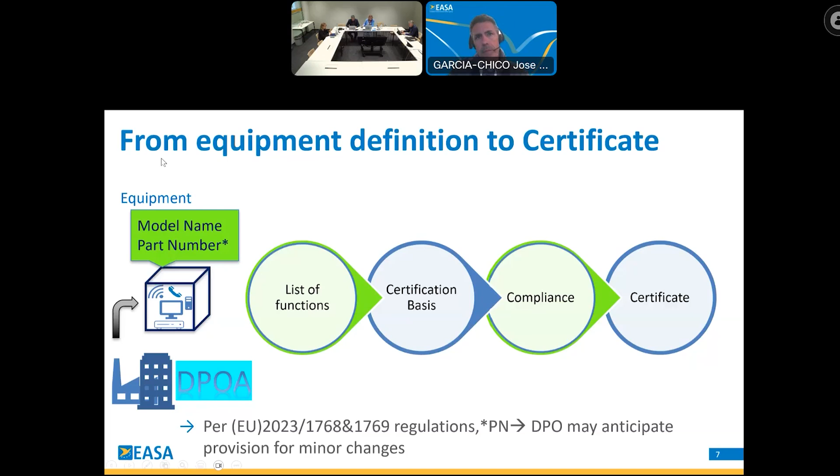So then if we transfer this in more generic terms, we were in the certification context. Now let's take the broad picture of the full conformity assessment attestation. Here in the conformity attestation, if we cover a certificate, but also declaration of design compliance and SOC per Article 4, 5, and 6 of the regulation, we have somehow the same concept. The difference is where do we have interaction with EASA.

So the applicant, in the case of DPO, in the case of Article 4 and 5, we will need a DPO approval, and it's a DPO that goes for declaration of design compliance, or goes for certification. But we start with a model name and a part number to describe the equipment.

The initiator of the attestation would list the functions that are embedded into the equipment. This list needs to be present in the attestation. Then with this list of functions, the attestation basis can be defined, meaning what are the applicable detailed specifications that apply to this equipment.

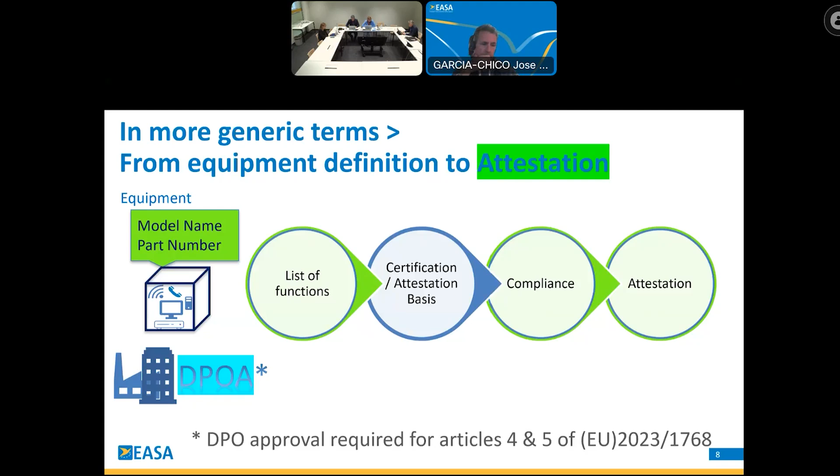Now let's look more deeply at the definition of the certification basis and the attestation basis. In the context of Article 4, we will speak of certification basis. Article 4 equipment of the 1768 regulation requires an EASA certificate.

As we just said, the equipment is described with a list of embedded functions. This list of embedded functions is typically described in a certification program. But the certification basis will already be defined at the time of the application. In defining the certification basis, it's actually all the detailed specification sections that are applicable to the listed functions, plus the applicable general section.

We need, in the definition of the certification basis, to reference the issue of the detailed specification that is applicable at time of application. Today, the detailed specification is at issue 1, so there is not much debate on what is applicable. But imagine in 10 years when we have, for instance, six issues of the DS - how does it work? It works at the time of application. The detailed spec that is applicable is the one issued at the time of application.

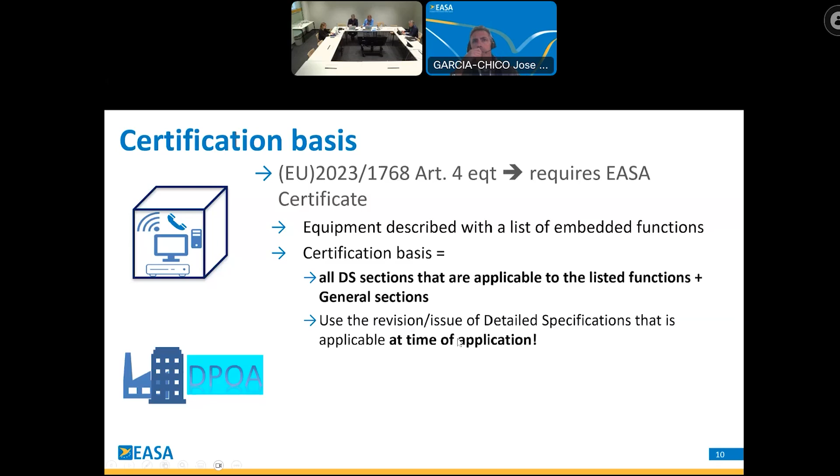Here's a small diagram to explain this over the long life. Imagine we have a detailed spec and the application occurred while we were at issue 1 of the detailed specification. If the certification project lasts more than, let's say, 2 years, then we would probably have issue 2 of the detailed spec already. The applicable detailed specification is still the one at time of application, so issue 1.

Nevertheless, it's always possible, on a voluntary basis, for the DPO holder to make a deliberate choice to elect to comply with a later issue of the detailed specification. The DPO could elect to comply and change the detailed spec issue to issue 2, for instance.

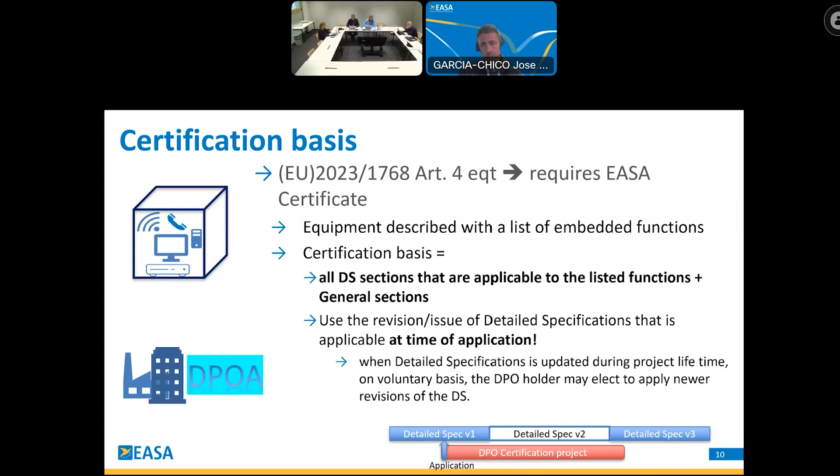Now let's come to an example on how to define the certification basis - for instance, a voice communication system. We go to the detailed spec. The detailed spec applicable for voice communication system is DSGE-DEC. In this document, you have a Part 1 that is general, applicable to all equipment in DEC, and a Part 2 that is for certification. Inside Part 2, we have Subpart B on air-ground com, and then Section 2, voice communication.

So the applicable certification basis would be Part 1, the generic section, plus the one referencing the voice communication system. So we go to Part 2, where there would be a generic applicable section, and then go to Section 2, where the voice communication function is depicted in requirements and AMCs. This is an example for a single function in the equipment - just the voice communication system function inside that equipment.

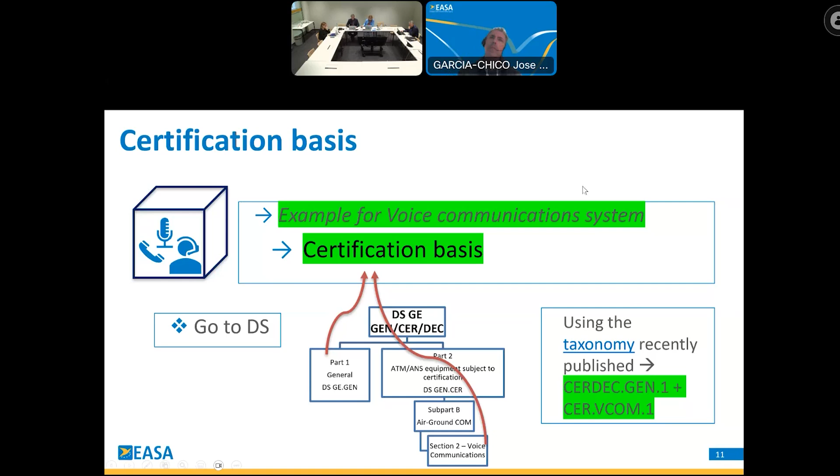In case of multiple functions, all the detailed spec sections that are applicable to the listed functions define the certification basis, associated with their general section. Here we've identified a case where a function goes under certification, Article 4, so there is an application to a certification project at EASA. But if this equipment also contains functions that are part of declaration, Article 5, or part of SOC functions in the detailed spec, then we need to identify them in the attestation basis in the equipment.

By this, we want the equipment functionalities to be well depicted in the certification project as part of a meaningful set of functions working together, and also to guarantee that there is no alternate function that could impair the certified function. That's the main logic behind this. We want the certification basis, then the attestation basis, to be complete and well defined in the certification program to cover all the embedded functions. They will also be part of the final declaration document, the DDC document.

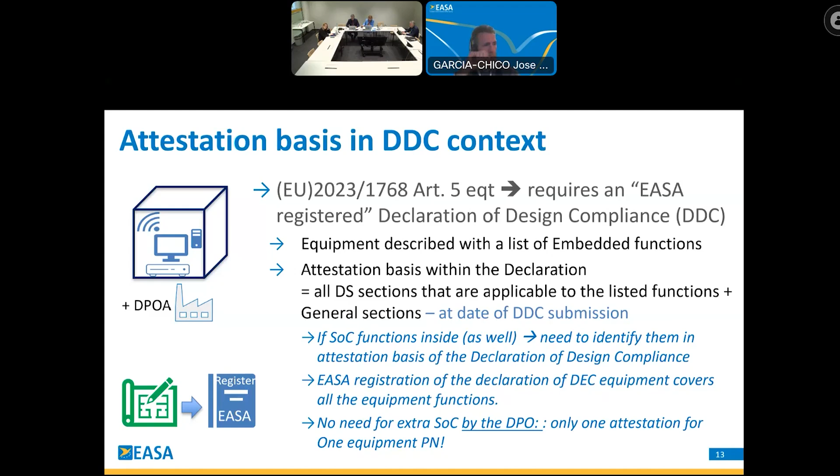Now let's go to the SOC context. In the SOC context, you see at the bottom, we don't identify DPO because the SOC is issued by ANSP, or it may be issued by the DPO in case the DPO has been delegated the task by the ANSP. So in the case of SOC context, it's only functions that require an SOC. They cannot be embedded certification or declaration functions within an SOC, otherwise it would be an Article 4 or an Article 5 equipment.

The attestation basis would be all the detail spec sections that are applicable to the listed functions. So here we look at DS SOC, and we apply the general section of DS SOC, and it will be the attestation basis that is applicable at the date of the SOC release.

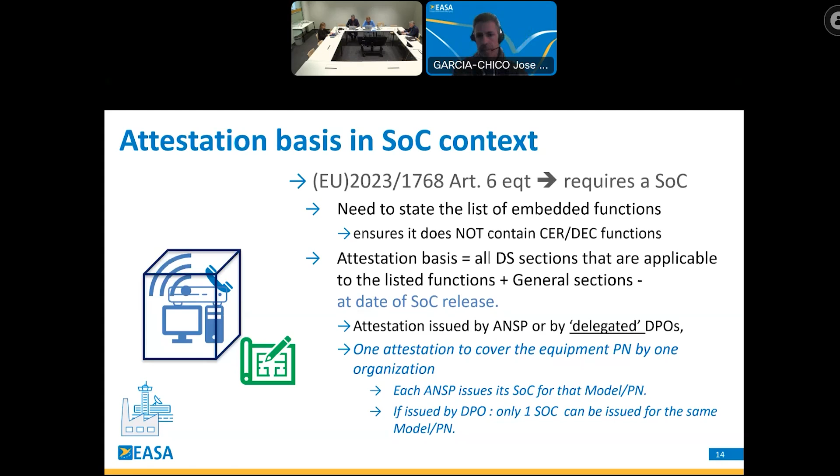The attestation is issued by the ANSP or by delegated DPO. In this case, there is one attestation to cover the equipment PN by one organization. Each ANSP issues its SOC for that model PN. So in that case, an ANSP would issue the SOC one single time for that model and part number. And in the case it's issued by DPO, it's only one SOC that can be issued by the DPO for the same model name part number.

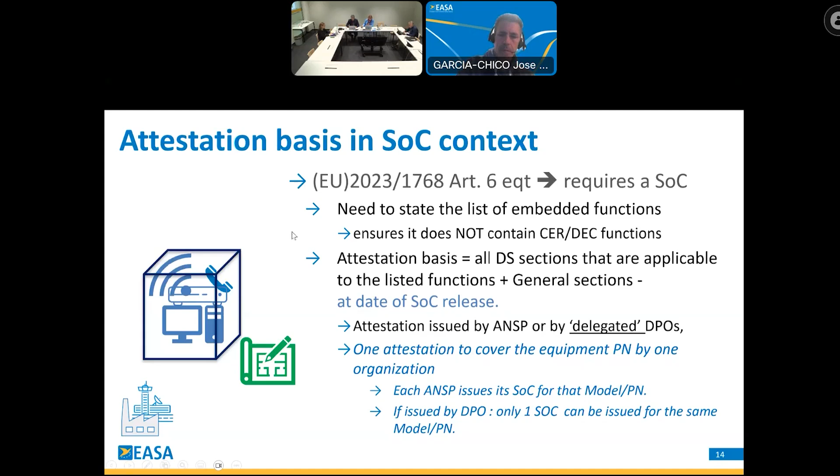Let's move now to the specific situation where a deviation has been requested. What happens to the certification basis? In the 1768, we have extracted here the article that speaks about the certification program, and that inside the initial certification basis, there is a possibility to propose deviation.

We will have some further slides about the generic process of the deviation, but we want to identify that the deviations will follow a certain process that will be subject to EASA approval. The deviations, when approved, to the applicable detail specification and their AMC, they are in a manner amending the applicable cert basis. So the cert basis will be the applicable detail specification together with the associated deviation. Both together reflect what the equipment shall comply with.

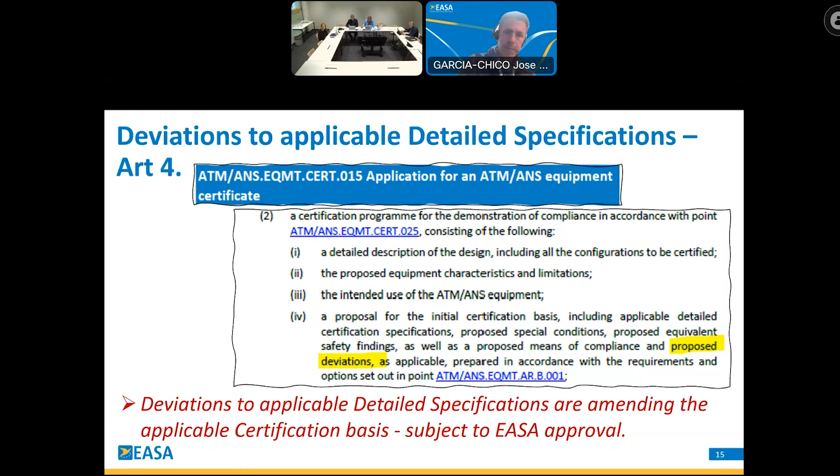We will come back on the process for deviation in the other presentation of the process. So this finishes the presentation of the certification attestation basis. And now we would like to switch to the topic that talks about the part number and the associated design changes in relation with the certification attestation basis.

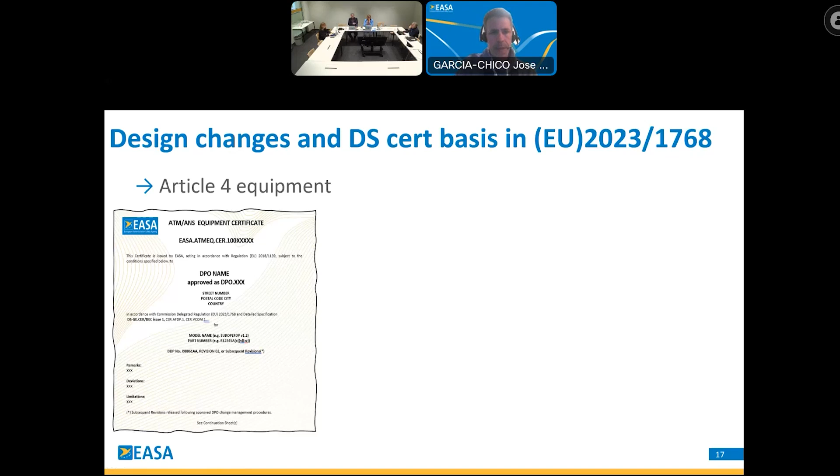José Luis? Yes, should I take over the slides because they are animated, so maybe it's easier if I do it. If you like. Yes, so let's see if it works. I'm sharing my screen. Do you see the slides now?

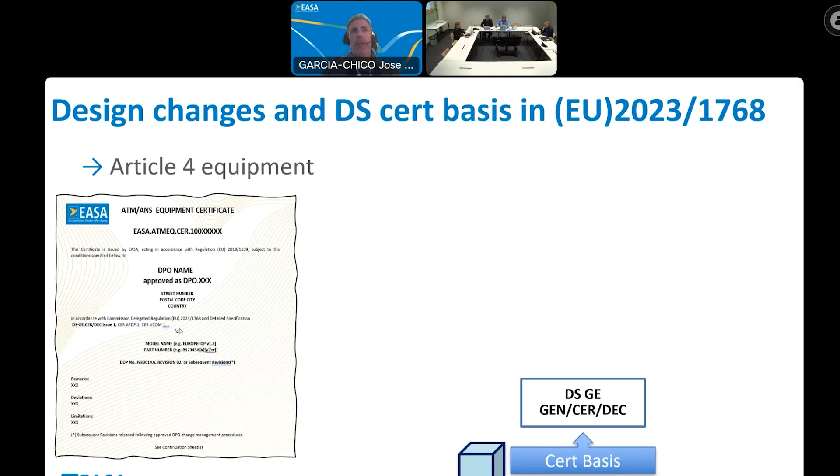The certification basis is also referred to in the certificate, so it's captured here with the taxonomy that we recently have published. Basically, with the list of requirements that are in the detailed specifications and additional requirements if they are accepted as the certification basis.

The other element that I mentioned are the minor changes. So the minor changes - it's a privilege to introduce these minor changes to the equipment design when the DPO is approved. This is recognized in regulation 1768. Here I copy the regulation text, certificate requirement CERT 060. So you have the legal reference.

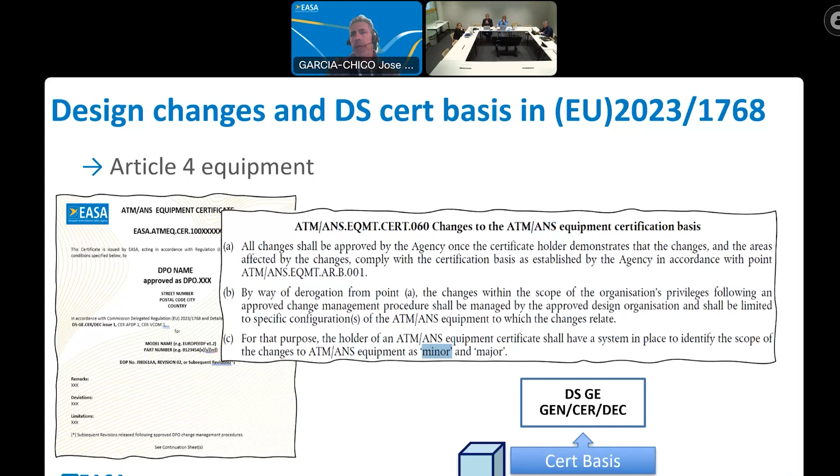I saw also some questions about what are minor or major changes. We are not going today to enter into this distinction, but basically the main concept behind minor changes is when you don't need to do a re-verification of the design. There are some conditions, some criteria in the AMC. We will not go through them today, but just keep the concept that the minor change needs to be in your head. We will discuss the borders between minor and major during the workshop. Don't worry about that, but what we want to stress today is that the minor changes are covered by the certificate, so no need for a new certification of the equipment. But let's see how these minor changes need to be captured, how they need to be described.

So again, the first thing is that when we approve the DPO, when we give the approval of the DPO and we check the procedures, we check that the DPO has a procedure or a system in place to classify the changes as minor and major. As I said, criteria to define minor and major are in our AMC, but the DPO also has to describe this into their own terms, into their own equipment. So these criteria need to apply there. So we check this process, we approve this process, and once this process is approved, then the privilege of the DPO to classify changes as minor or major is there.

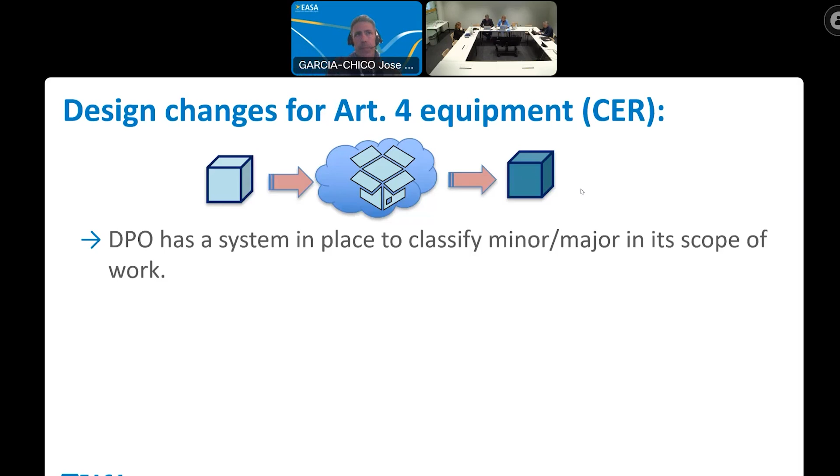In any case, these minor changes need to be described in this procedure. But normally this procedure doesn't capture all the low-level details of the minor changes. So when these minor changes are anticipated - basically captured in the process and also approved by EASA - these minor changes also need to be captured in the part numbering scheme. Basically, the part numbering should have certain digits dedicated to identifying those minor changes that have been anticipated in the process.

And for that reason, because the part number is captured in the certificate, it covers all the minor changes. That's why it's important that minor changes need to be anticipated and also covered in the part numbering scheme.

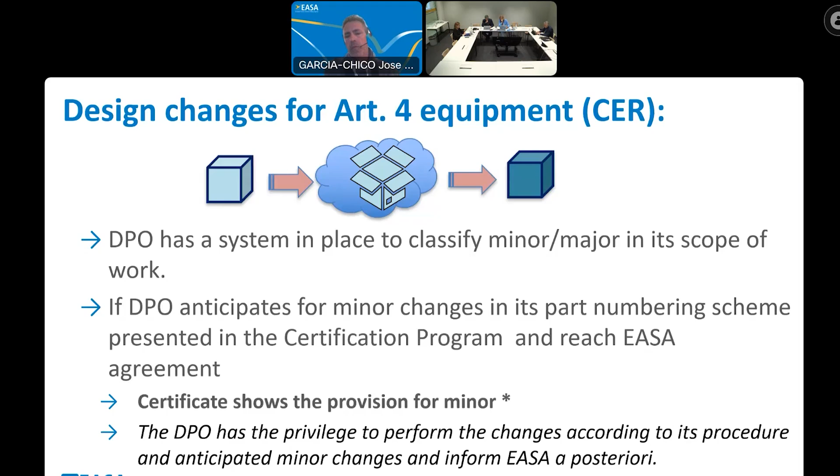When this is done, then in the regulation you find obligations for the DPO to notify these minor changes, but these can be notified a posteriori. We will see later this morning how these minor changes are registered, because we have suggested that these minor changes be registered into the templates of the declarations, the Declaration of Design Performance, the DDP, or the Declaration of Design Compliance, the DDC. But we will see that later. Just keep in mind that's how we are proposing to register these minor changes.

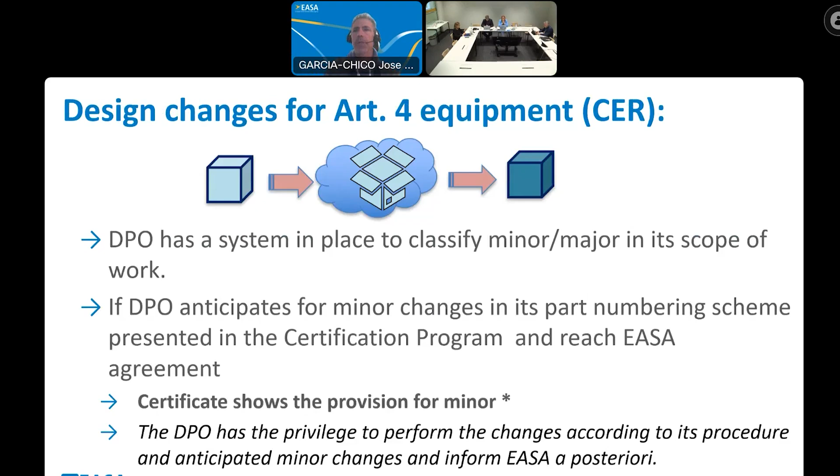Maybe worth mentioning here that when there are minor changes that haven't been anticipated, this should follow the process as if it were a major change, just submitting to EASA, analyzing, and then accepting as a minor change. And then in the future, that minor change would be incorporated into the certificate and into the part numbering scheme.

So how to anticipate the minor change here? I'm going to repeat probably what I've said, but I think visually it will help us understand and grasp the concept: the classification procedure. This procedure is mandatory by the regulation. So the DPO will have this procedure to identify all changes they make to the design of the equipment as minor and major. This procedure is approved by EASA during the approval of the DPO.

However, normally this procedure will not be detailed enough for the specific equipment to identify or anticipate all the minor changes. That's why during certification, when the applicant submits the certification program, initially in the certification program, and at the end of the compliance demonstration in the DDP, the Declaration of Design Performance, in both documents, the detailed description of the anticipated minor changes needs to be described, needs to be captured, needs to be stated. And this description also has to be linked to the part number scheme.

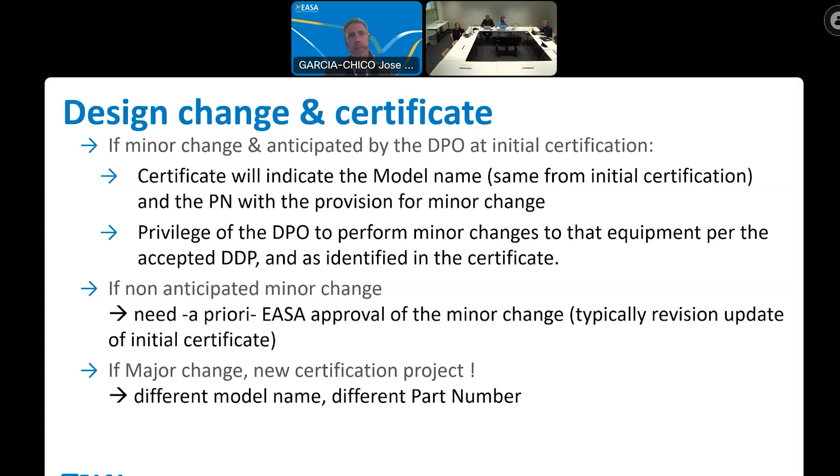So again, as a summary, a minor change uses the same certification basis as the original, and there is no update or upgrade of that original certification basis. Major changes need to apply for a new certificate, and in that moment it takes the new certification basis of the detailed specifications.

Here, a clarification: if there is any change on the certification basis, that is classified as major, because it is considered that a significant effort to perform reinvestigation of compliance needs to be performed.

For the declaration, the concept is similar, the approach is similar. Of course, there are a few differences. First, this is governed by the regulation in a different place. So the requirement is DEC 020, where you can find that there are major and minor changes.

But here in the declaration, we don't have a certification program, because the intervention of EASA is not happening at the beginning, but at the end, when the equipment is declared. Again, the concept is similar in the sense that EASA approves the procedure to identify minor and major changes.

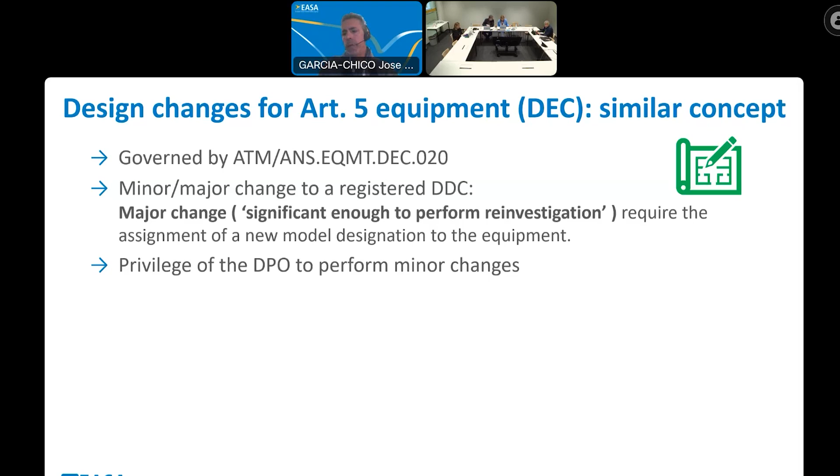As in the certification case, we will see later when we check the templates how these minor changes that have been anticipated for the declaration will be registered. We are proposing that they be registered in the DDC itself. And as I mentioned, that's the privilege of the DPO when EASA approves the procedures.

More in practice, these procedures to identify minor and major classification are captured in the definition of minor and major changes in the procedure. But normally, as in the case of the certification, we are not expecting to have all the details in this procedure. The main details of the anticipated minor changes will be described in the DDC, the declaration of design compliance.

Remember that in the certification case, we have this detailed explanation of the minor changes anticipated, first in the CP, the certification program, later in the DDP, the declaration of design performance. In the case of declaration, this will only be captured in the DDC, the declaration of design compliance.

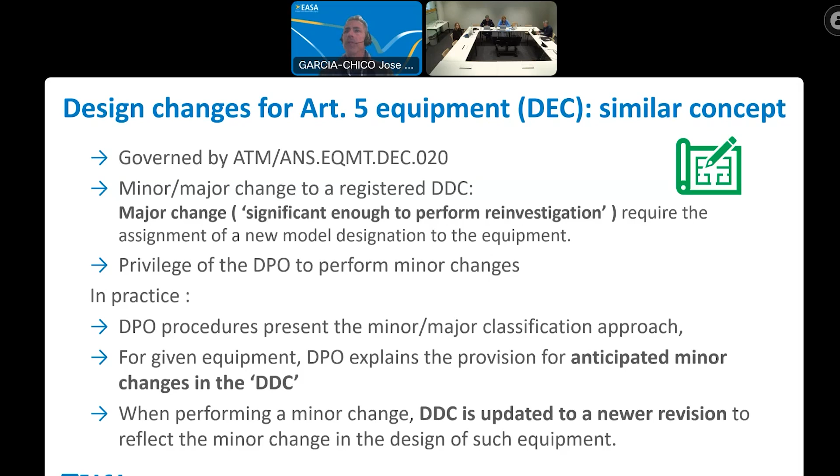Again, when there is a minor change anticipated, the DPO introduces this minor change. This is registered in the DDC, so it's only a new update of the DDC, but the DDC issue number remains the same. So it's not a new declaration, but a new update of that particular declaration.

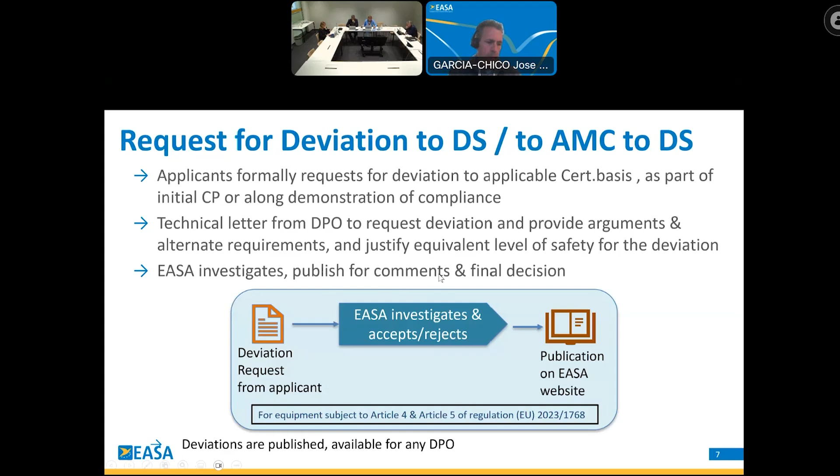When the comments are received, EASA assesses the comments and then publishes a final decision. The last step, EASA issues a certificate, so all we are working towards is to reach full acceptance of the declaration of design performance.

The DDP is the final DPO document, and it includes the very important statement of compliance of the DPO holder to the cert basis, and the signature.

The EASA PCM will assess and accept the DDP. EASA issues the certificate and sends it to the DPO. We will also publish the reference on the EASA website with a list of certificates per DPOs, and this is typically done in all other domains.

At the end, the certification project will be closed by the FS Directorate, the applicant service team, and the DPO will be notified of the closure of the project. At the closure of the project, the time spent by EASA is logged, and finally all is clear from the closure.

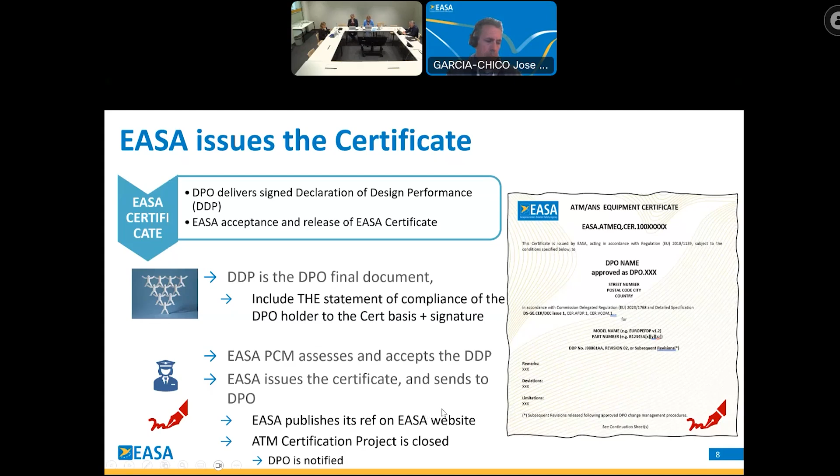But that was in the big lines. We switch to the last topic before the break - we will have a 10 minute break after. A short view on the registration process for the ATM ANS equipment declaration of design compliance.

This presentation will cover the steps and will also cover the deviation request in context of the DDC. In the context of declaration of design compliance, they are issued by the DPO, so the attestation is the DPO attestation. EASA makes the registration of the declaration of design compliance, and we will look at the process.

The process is a streamlined process, and it conforms to the 1768 regulation. The DPO initiates the project and will deliver the declaration of design compliance, and EASA will assess and feedback in case feedback is needed, and register.

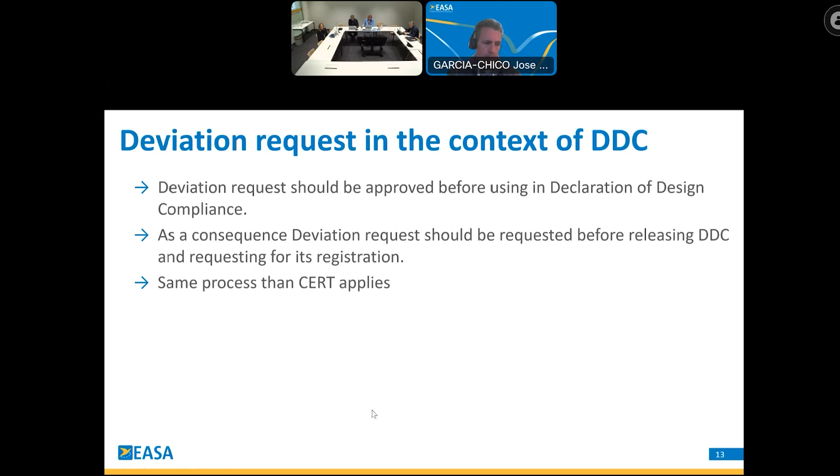Otherwise it would create iterations. So we propose to have it approved before using it, and as a consequence, the deviation request should be requested before releasing and requesting the registration. But for that, we would apply exactly the same process as explained before, and I will come back on it with a technical letter to explain the deviation request from the DPO applicant.

Here it's a deviation request from the declarant, in official words - it's a Declaration of Design Compliance, so it's a deviation request from the declarant. But to support an EASA decision on the deviation request, here, in contrast with the certification context where we have a cert program and where we know the equipment, here we have a letter to request deviation, but we don't know the equipment before we have received the details in the DDC.

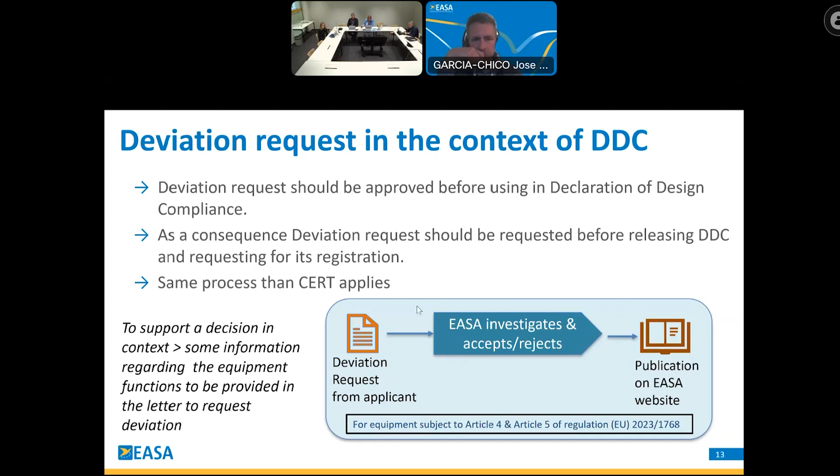So we ask to have a bit more information from the applicant, from the DPO, from the declarant, regarding the equipment functions, to have a bit of context to assess the requested deviation. Though the requested deviation is on the detail spec and not on the equipment, we need a bit of context to support our decision, to have a decision in context. So the same process applies.

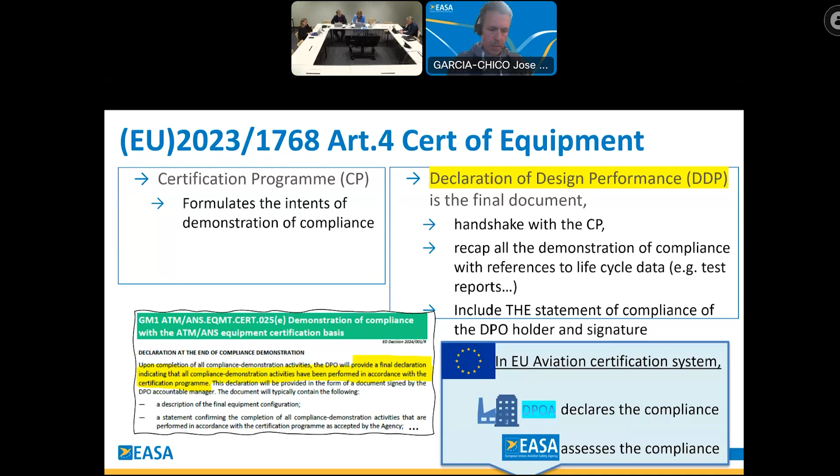So we have provided CP and DDP templates. For those who have already worked on their template, we want to stress it's not that applicants who have already prepared are at a disadvantage. For us, these templates are provided to guide DPO applicants in the elaboration of their own company templates. And those documents are essential in the certification process.

You have seen how they are interrelated in the certificate world. So we provided more guidance by publishing those templates on the EASA website. It shows also our expectation in terms of content for the certification document in more detailed wording. And also it would help avoid iterations in the certification project. So we consider them as bringing some efficiency in our mode of implementing the conformity assessment framework for the certification aspects.

Last but not least, again, the templates are produced for guidance. They are not mandatory. They may be used by applicants to integrate into their own template. And just to say that they are for guidance. So if we now look at the certification program, let me share the document.

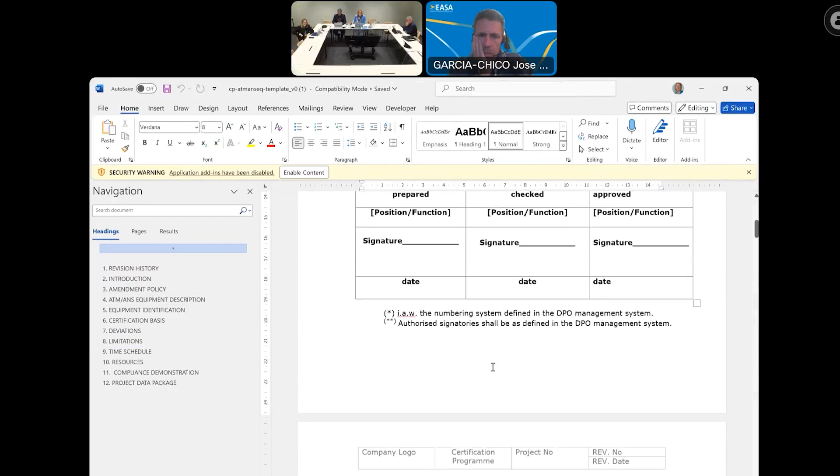So you see that we have put some guidance with a certain list of topics here on the left. I will go to the table of content. So for the CP program, first you see that we need a signature by the DPO, some checks, some approval by the DPO, a typical configuration control document. But then we have introduced a list of topics.

So revision history in case we have some back and forth feedback loops with EASA. Then an introduction to introduce the scope of this document when it's applied on a given certification project, and when to amend this document.

Then we have the equipment description, core content. It's the start point - the applicant comes with an equipment under certification. So equipment can be a system or constituent per 1768 regulation. Equipment is a large notion and can cover a system or a constituent.

Then we have the equipment identification to have the formal identification. Then we have the certification basis.

And we'll come back on the deviation and limitation, an identified time schedule. If by the end of the project the schedule is a bit different, we don't ask to re-update the CP program to reflect a newer schedule if we are at the end of the process. But the time schedule is to give an indication to EASA of the key milestones for the applicant.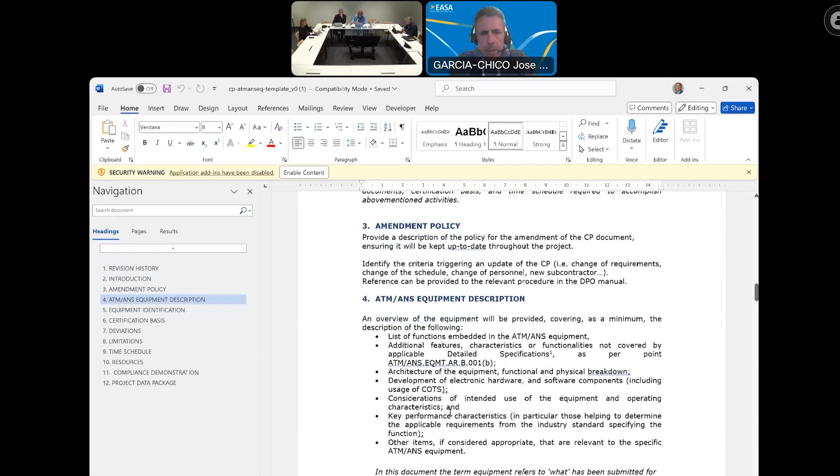So you see again the list of embedded functions, very important - all the functions that are related to the DS. Our regulation stresses the need for additional features, characteristics, functionalities not covered by the applicable detail specification that we need to know as well. If we have a feature that impairs the functions under certification, it's important we need to know.

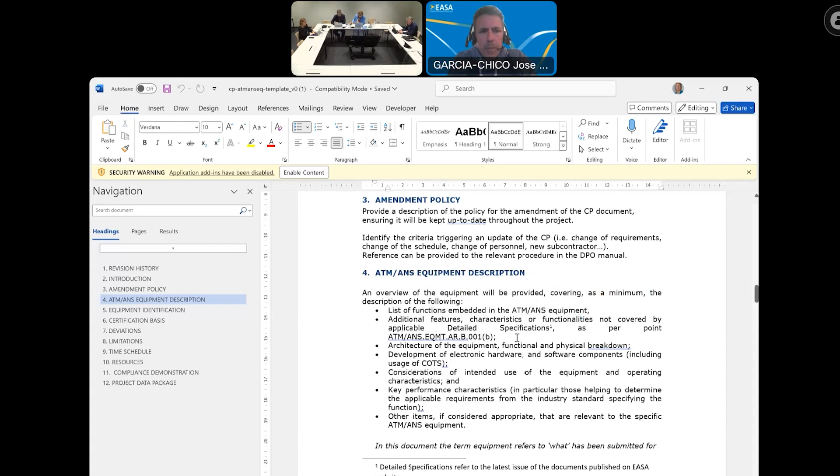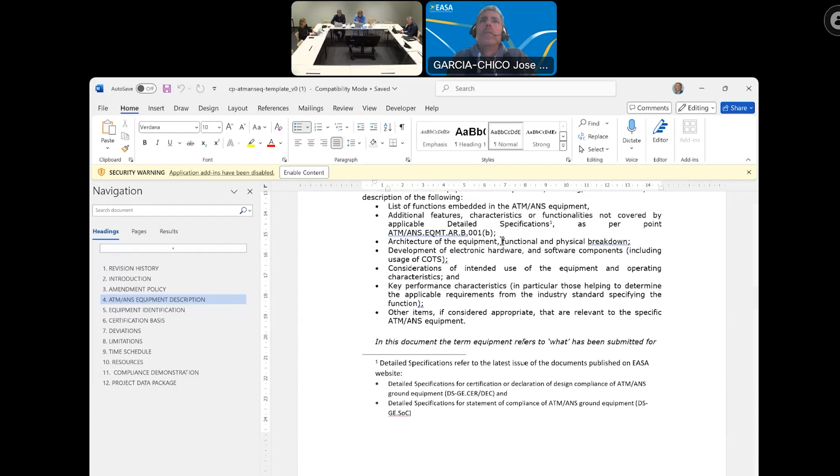Then we have the architecture - how the different constituents bring together, if the equipment comes with multiple constituents under one certification project, we need to know. There were some topics for hardware, software, because they are in the detail spec as a specific generic requirement. Key performance characteristics and other info to list what the equipment is.

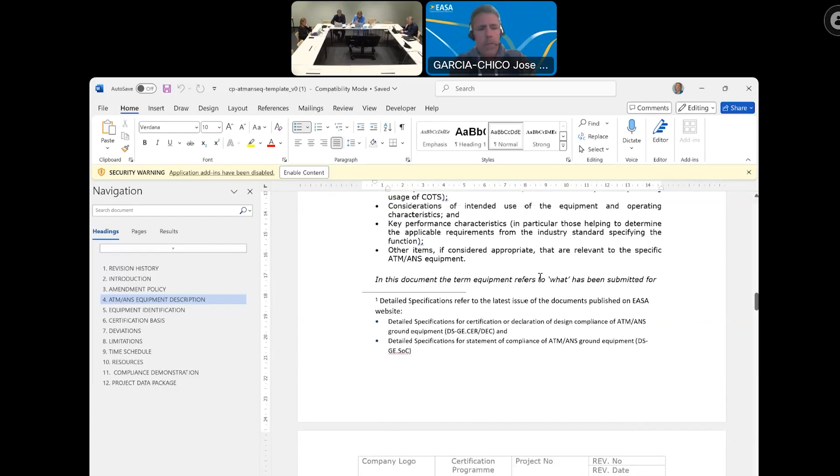It's really as we explained a bit there. If there is a software assurance level to be defined, this would be phrased also into the description. In the identification, we think here the official model name, part numbering, plus the part numbering scheme.

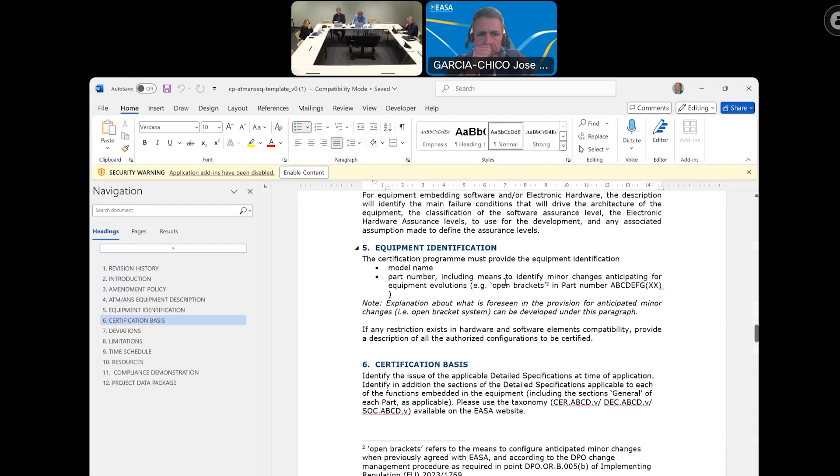The famous anticipation of minor change here should be explained, if the DPO wants to anticipate for minor change, and wants to have that privilege to perform minor change without informing EASA a priori.

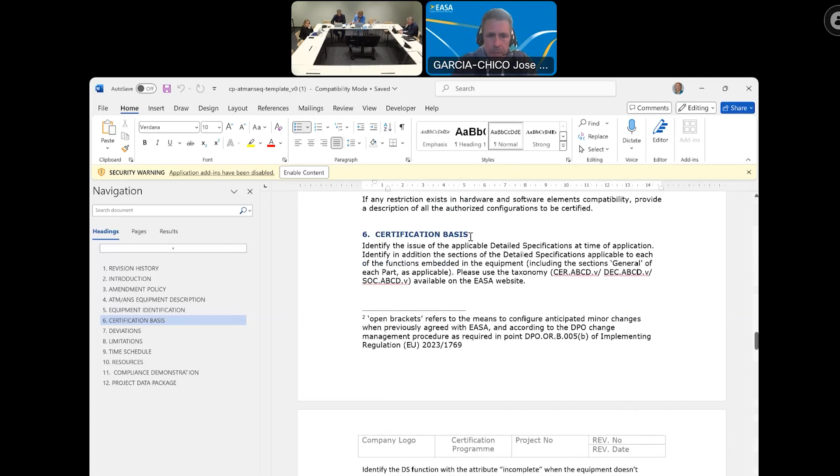The certification basis, I don't detail, you know all now what we have defined. There is this notion of environmental qualification in case the equipment is located in a specific environment - it needs to be identified because this would drive a specific demonstration in the full environment.

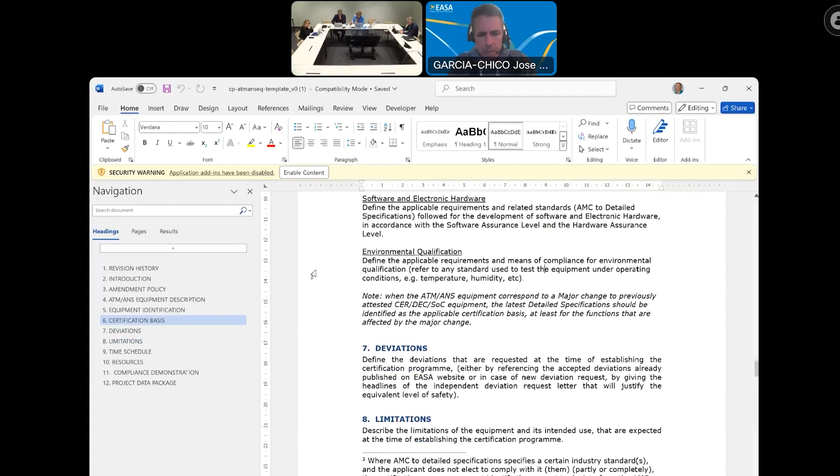Then we have a topic on deviation. So here we stress the need, like in other domains, to have a specific section on deviations to identify the deviations formally there. Same for the limitations. And in case there is none, then it's good to say that there is no anticipated deviation.

Good to say, because from experience we need that information at the time of issuing the certificate. And as soon as we know, as soon as we have a bit of context, this should be clear when it's already known at the time of the certification program.

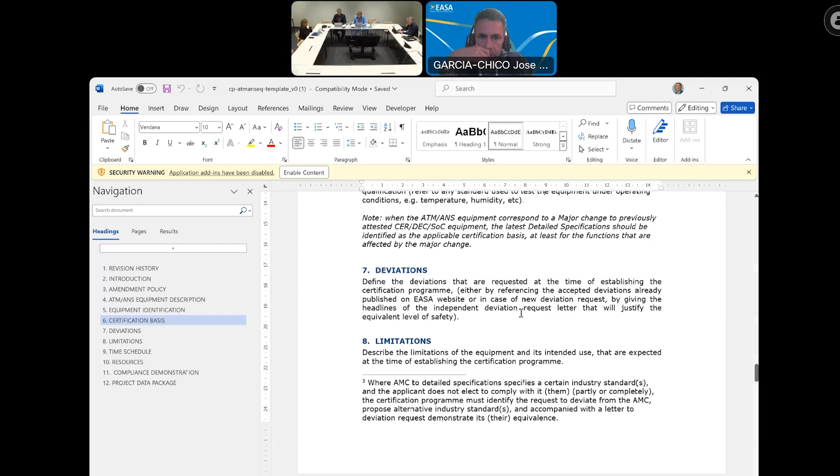Time schedule, I gave some words. We have put some - it's really up to the applicant, to the DPO to provide. We just have put some ideas.

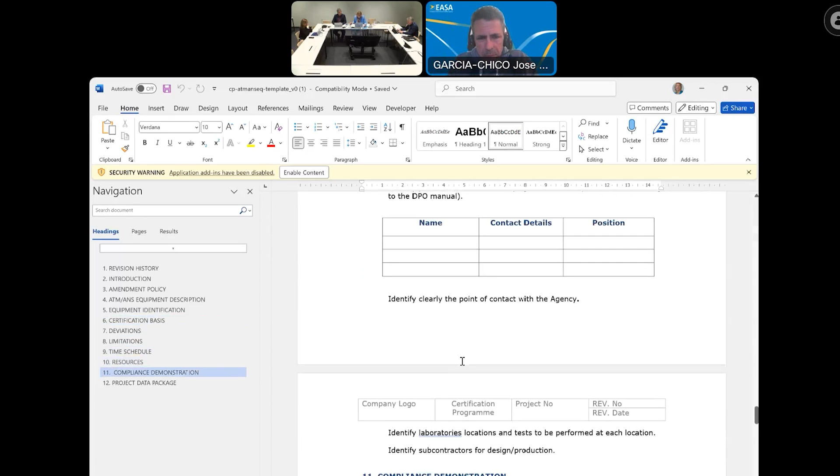Resources, the personnel in general, the clear point of contact for the project, for the agency. So we need to have the names of the people we are going to work with.

Then we have the compliance demonstration. So here it's to identify in advance the means of compliance in rough ideas. We are not doing the test campaign here, but we need to know the method. So for instance, the detail spec and its AMC request a physical test to test this software in this specific environment.

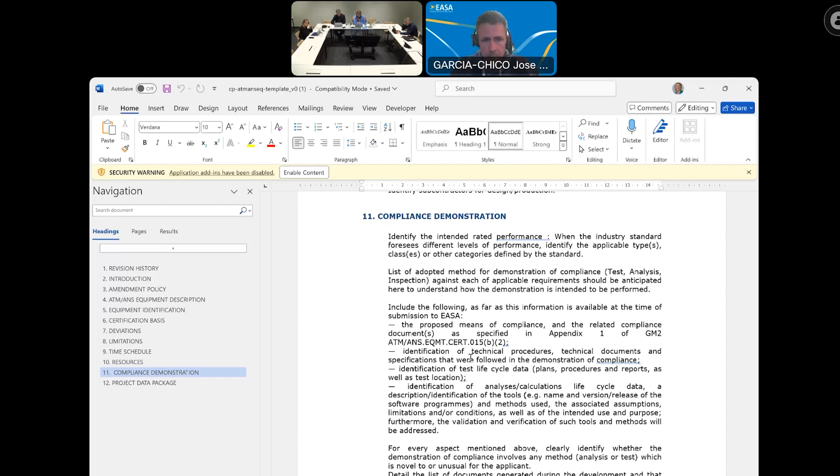Then we need to identify that the means is by test and not by review or inspection, this type of thing. This is to have a view, and also to identify which type of life cycle data will cover which type of requirement, like a test report. So it's an overview of the life cycle data, but in association with the requirements in the cert basis.

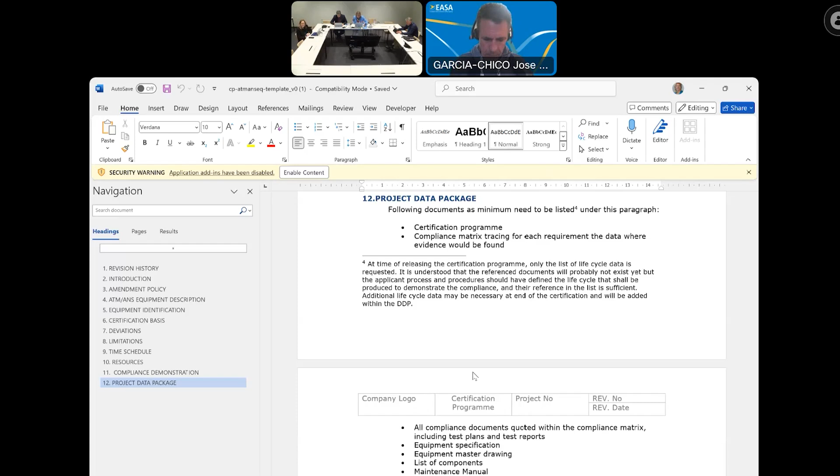And then we have the project's data package to have in the configuration management system of the DPO. They anticipate what are the different templates and lifecycle data that would be for the project, and this should be reflected as the project data package.

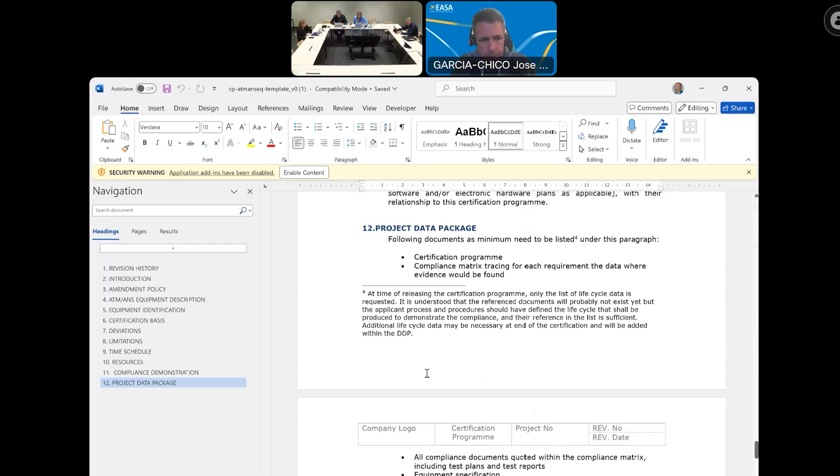So we go through, and I think we did the overview of the cert program. There is some text inside each section that is identified. So in this template, it's to help support the DPO to establish what is expected in the content. So I would stop here the presentation of the certification program template.

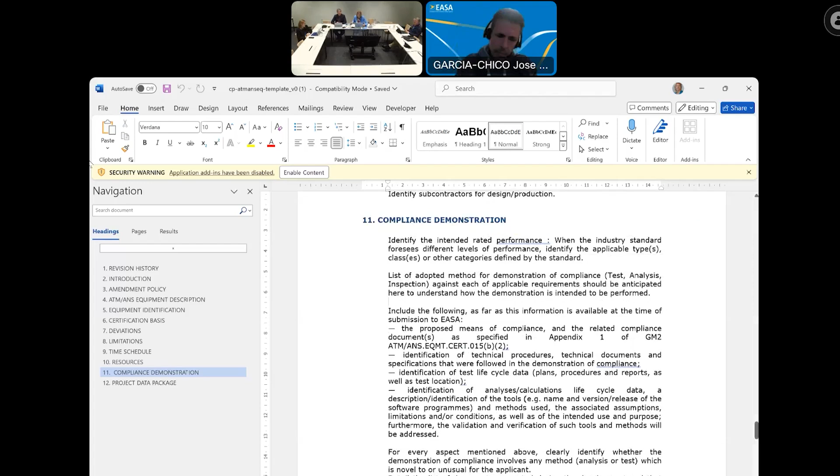We hope it was helpful to publish this material, but again, it's for guidance. I will give the floor now to José Luis. I stop here for this. Do you want to take the floor for the rest, José Luis? Yes, please, and I think it will be easier if I do it myself.

Okay, I think. Do you see the template now? Yes. Okay, you see the template, but I don't. Excuse me. Okay, now I see it.

Before, I will present the three templates of the declarations: the DDP, the DDC, and the statement of compliance. Declaration of design performance, declaration of design compliance, and the statement of compliance. Sometimes it's difficult to say the whole sentence rather than the acronyms.

I think it's worth stressing something that Anne has said, but I will repeat. These templates are guidance material, but some of the elements are already described in the material we call guidance and AMCs. In the AMCs there are some elements that are more important and recognized, and need to be captured. These templates are supposed to reflect that, at least for the material we have already published. In particular, with the certification program, the template Anne has just shown reflects the material we have published as AMC and guidance material, so it's compatible with that.

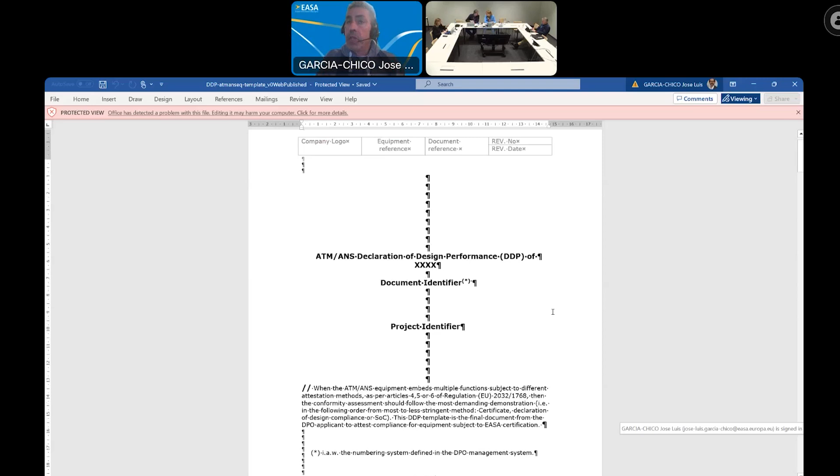In the case of the DDP, we don't have yet any material as AMC or guidance in the sense of our normal published guidance; we only have this template. The intention and purpose is to publish this guidance in the regular format in the next NPA, which will be published in summer, and will be in line with this template. So I'm going to show you the template. It's similar to the certification program, and some of the elements are actually the same.

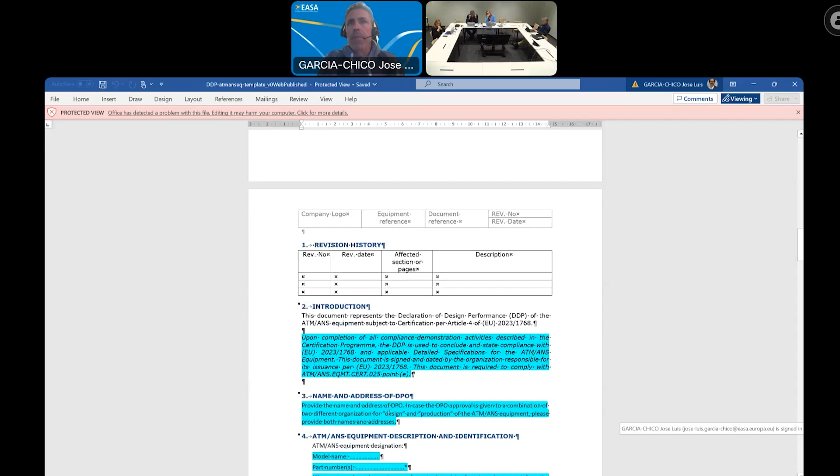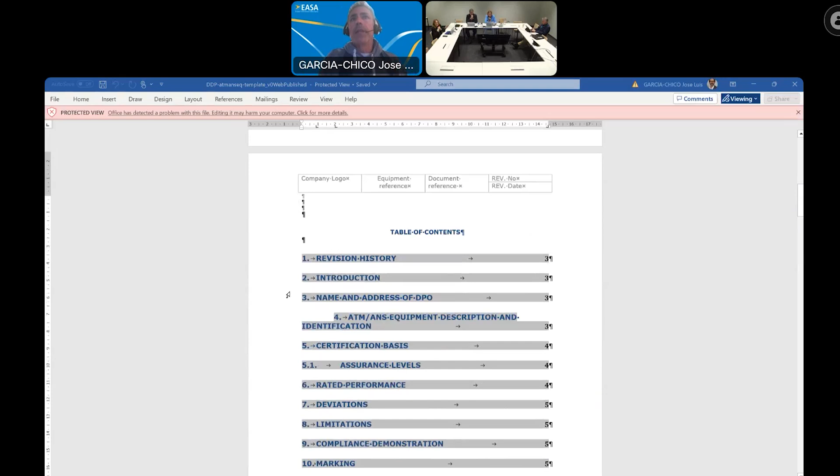I think I will limit the explanation to the table of contents, because otherwise you might start reading the text and get confused. I'll try to summarize the intended content to be captured in each of the points of the table of contents. You can of course download these templates, review and read them, and if there are still items not understood, issues, or questions, please bring them to the workshop, because we want to clarify everything there and identify any missing part or mistake.

So revision history is the revision history of the document, the different reviews, dates, etc., so nothing new. Introduction is also what the intent of this document is, as already expressed. In the case of the DDP, it's the document that concludes and states compliance with the certification basis when you have applied for a certificate. It's completed after the compliance demonstration activities are concluded, and submitted to EASA before the issuing of the certificate. That's the introduction that will be explained there. Name and address of the DPO is the name of the DPO and address, nothing surprising there.

I think item 4 is the one that contains some elements requiring a little explanation. This is actually very similar to what you should have already provided in the CP, so there's a section that probably will be almost exactly the same, unless at the end of the certificate you need to update it. But basically here you are including the model name, the part number scheme with the anticipation of minor changes as we explained, so we expect to find an explanation of the anticipated minor changes. You also need to list in this part all the functions that are covered, that are included in the equipment.

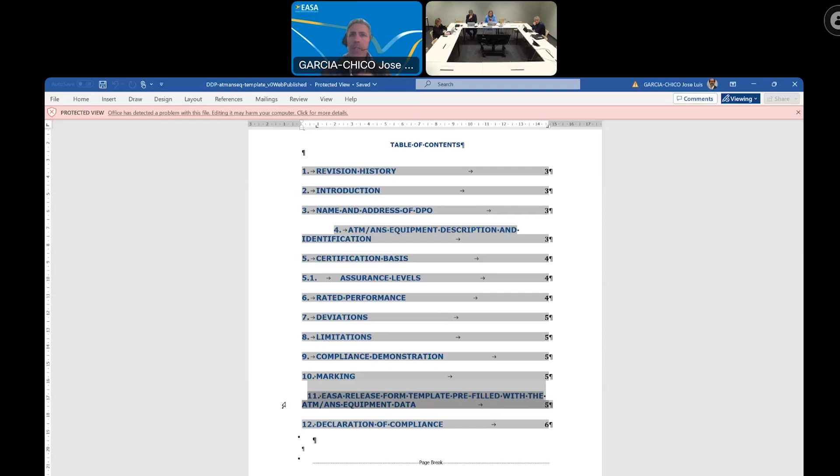That is something we are suggesting to include here, because it will facilitate everything afterwards. And then the final declaration of compliance.

Here is a statement that basically says the equipment has been designed in accordance or in compliance with the regulation, designed in accordance with the certification program, with reference to the certification program included in section 9, and also a date and signature by the authorized representative of the DPO.

The authorized representative of the DPO typically will be the accountable manager, but sometimes it could be delegated to someone else. That should be clearly defined in the DPO procedures. So when we approve the DPO as an organization, it should also clearly identify who has the authority to sign this declaration of compliance.

That's it, basically in a nutshell, the content of the different sections. As I said before, I suggest you download the document, download the templates, read it, and have ready your concerns and questions for the workshop.

So now let me go back, because now I will present the other two templates - the DDC, the declaration of design compliance. Again, the template has been provided for easiness for you to provide the information, and also for efficiency purposes for us to process the information.

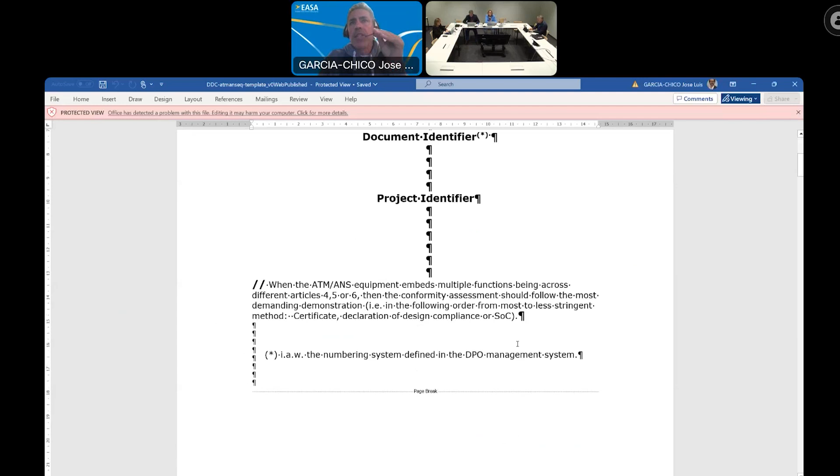So let me open the DDC template, which is not very different from the DDP, actually. It contains more or less the same content, only that in several sections there are some little differences. For example, revision will be the same - it's the revision history of the document.

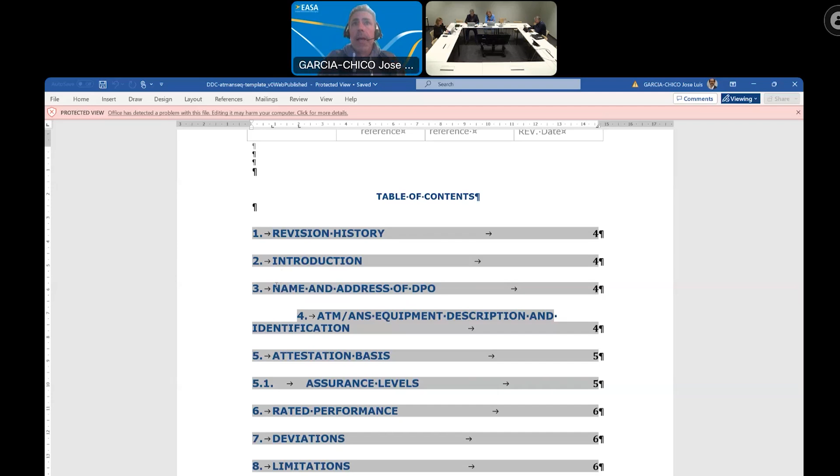The introduction here is a bit different. It's still an introduction of the document, the purpose of the document, but now it has to talk about this being a declaration linked to an equipment subject to Article 5 rather than Article 4 as before. But nothing else changes - the name and address of the DPO is basically the same content as before.

Equipment description and identification is the same here - we are expecting the same elements: the model name, the part number scheme, the description, the detailed description of the minor changes anticipated, all the functions covered by the equipment, as well as the matrix that captures the minor changes when implemented. So you will issue a first declaration, the first version, and you will need to update this declaration as you implement the minor changes anticipated, updating this section.

The rest will remain the same. Attestation basis - here we don't have a certification basis, we have the attestation basis, which is built with the requirements in the detailed specifications about the functions subject to Article 5, to the declaration, but the equipment may also include additional functions subject to the statement of compliance. That should also be listed here. But as in the case of certification, one single attestation will be associated to the equipment.

So in this case it will be a declaration - if the declaration contains functions subject to declaration but also subject to the statement of compliance, these will be considered or included all together here.

Let me show you the statement of compliance template, which is very similar. Again, in blue text there are guidance notes you should delete at the end, and then the table of contents, which you will see is very different. We have a revision history of the document, an introduction explaining what this statement of compliance is, and the name and address of the ANSP, if it is the ANSP issuing this statement of compliance, or the DPO, or both. If it is signed by the DPO, it also needs to include the address of the ANSP.

Okay, I will stop the link. My computer is...

Yes, it provides both names, a description of the equipment, and the identification of the equipment. Here we have the model name, part numbers, and all functions included in the equipment, as previously mentioned.

The change description, including minor changes, should be described here. The attestation basis is linked to the requirements in the detailed specifications, plus the assurance levels that we are also asking to include.

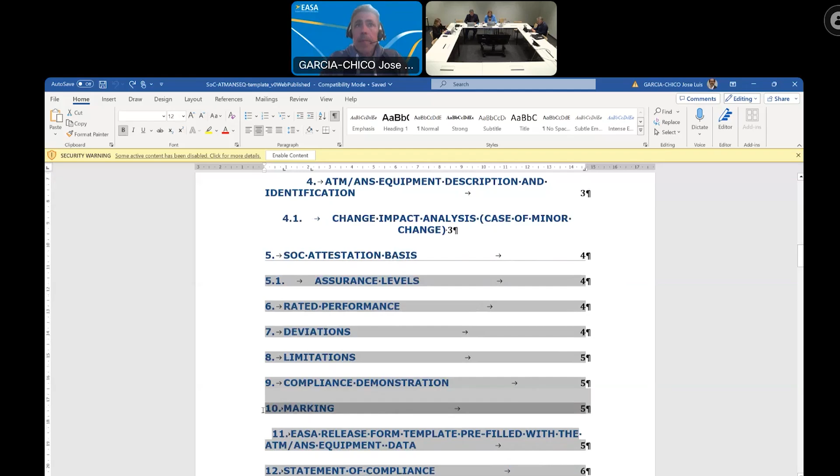Marking again is a template or a prototype of the marking. And in the case of section 11, this is only when the statement of compliance is issued by the DPO. We are also recommending to include an EASA release form.

As you know, there is no requirement in the regulation that requires this form, but we recommend having the same processes for this type of equipment developed by the DPOs.

If there is no DPO involved in the declaration, in the statement of compliance, the EASA release form is not issued by the ANSP because they cannot do it. So this section will be left blank.

And finally, the statement of compliance, which we are also proposing some text for, so you don't need to amend anything there. So that's basically, in a nutshell, the three templates.

Just a few words to summarize that these templates are quite similar, as you have seen. These templates declare basically the compliance of equipment, the model name and the part number with the detailed specifications, or more generally with the attestation basis, in the case of certification declaration and the statement of compliance.

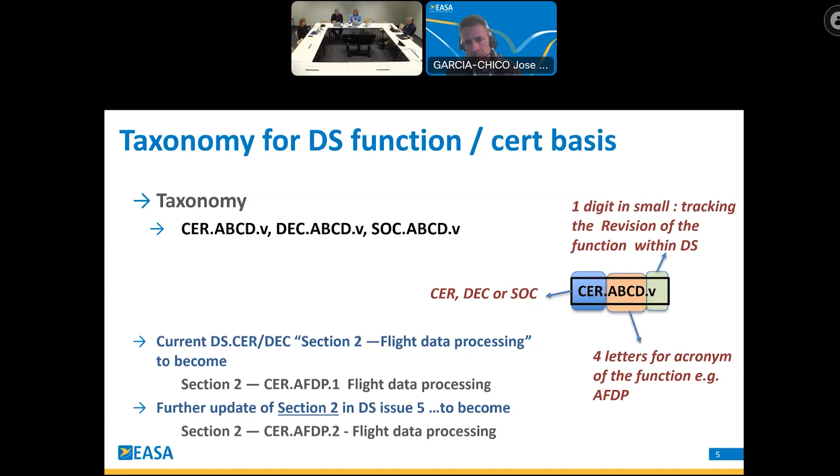The next question is about the expectation of changes - the type of changes to be included in the certification program of the DPO. The question is: is only the type of change, for example bug fix or minor feature change, to be anticipated in the certification program, or the specific change itself? Whether it's the type of change or whether all changes need to be listed in anticipation.

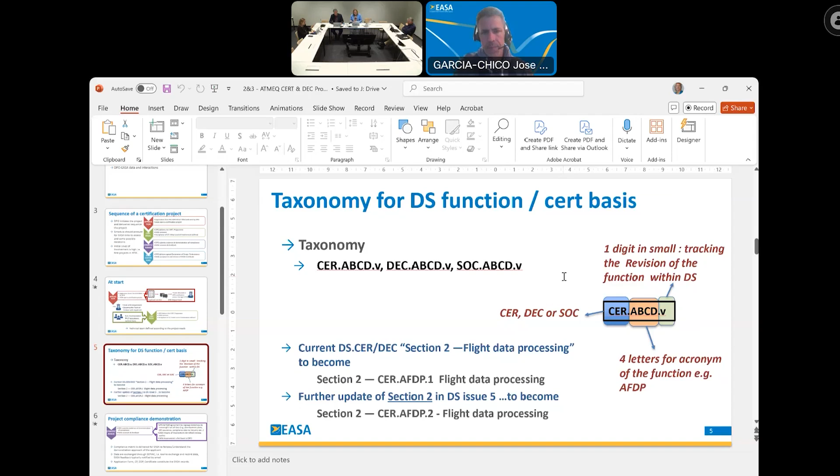It's a type of change, not the change itself, but with classification criteria that are explained. The applicant comes with a procedure, and with the procedure there will be a method to classify. On the equipment project side, the DPO explains what is anticipated as detailed criteria for this specific equipment. So we imagine there could be more refined criteria for a VCS, a voice communication system, compared to criteria for flight data processing equipment.

So there could be a refinement on the type of minor/major classification, but it's not a predefined change. But there could also be a predefined change. For example, if we already anticipate 4 families of equipment - blue, red, black, white - and the difference between them is just color, it could be seen as a minor criteria, and then it could be anticipated too. So it's really up to the DPO to bring how his structure anticipates minor change with certain criteria.

Thank you, Anne. I suppose you raised your hand. Would you want to complement? I think it has been addressed by Anne.